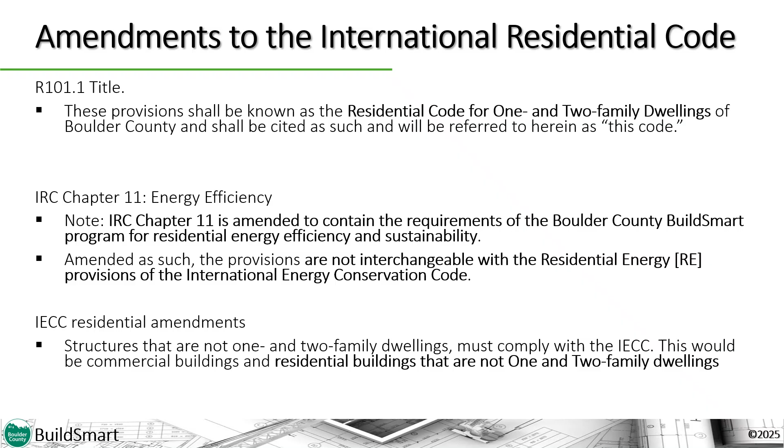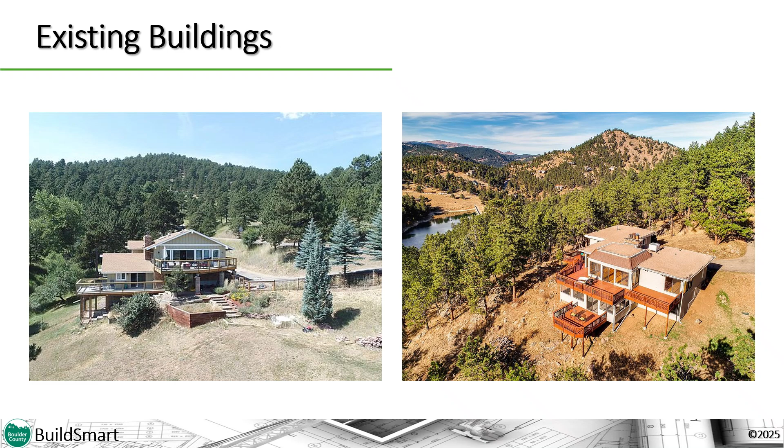For information regarding requirements for additions, remodels, or alterations to existing buildings, you will need to start with Section N1109 of the BuildSmart code. If you are considering an addition to an existing home, you will then focus on Section N1110, and if you are considering a remodel or alteration to an existing home, you will focus on Section N1111.

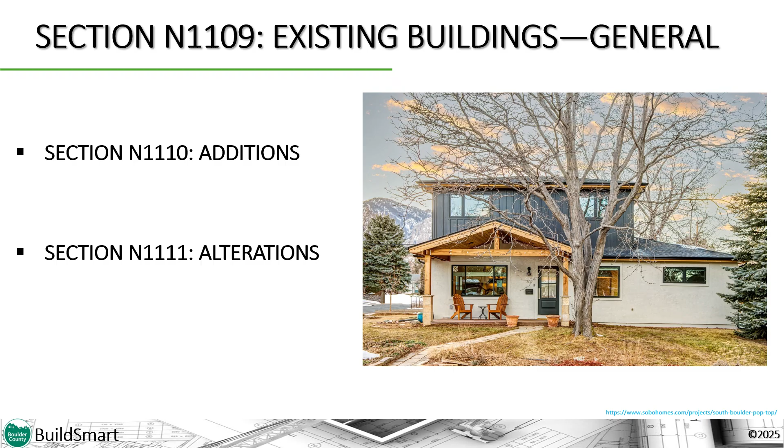Boulder County has also created a number of submittal guides specifically to help walk you through submitting for a building permit for an addition to an existing home or permitting a remodel or alteration to an existing home. These documents can be found on the county's website.

To begin your compliance journey for your existing home project, you will need to determine the total conditioned floor area of the proposed completed project. This means that the submitted construction documents must include both an existing and the proposed floor plans, so the total conditioned floor area can be verified.

This is the floor area used to determine the compliance pathway that you will have to use when you apply for your building permit. Just a note here that will be explained in more detail later.

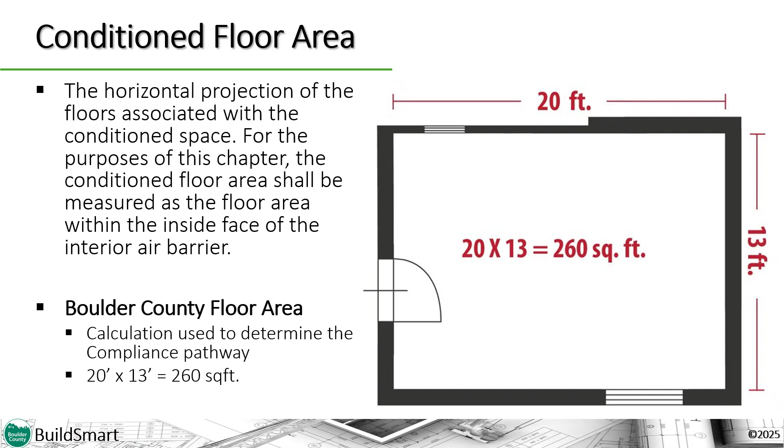When generating the HERS Energy Rating Index score, the rater will have to follow the RESNET HERS standard ANSI 301 and calculate the floor area based off of a measurement from outside wall to outside wall. I bring this up because you will need to recognize that these two numbers are different and are used to describe the conditioned floor area of your project for different purposes. Again, I will speak to this in more detail in a minute.

Similar to new construction, the provisions for demonstrating compliance when proposing to build an addition onto an existing building are broken up by the size of the addition. The prescriptive compliance option can only be used when building an addition that is less than or equal to 500 square feet of conditioned floor area.

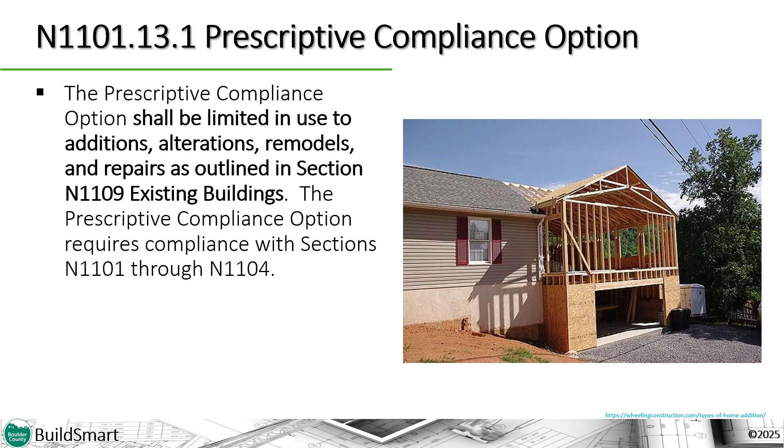The prescriptive compliance is a method of adhering to building codes by meeting specific predetermined requirements for individual building components or systems, such as a minimum R value for wall insulation, for example. The prescriptive compliance option does require compliance with Section N1101 through N1104, which are requirements that govern insulation R values, mechanical and lighting installations, and the like.

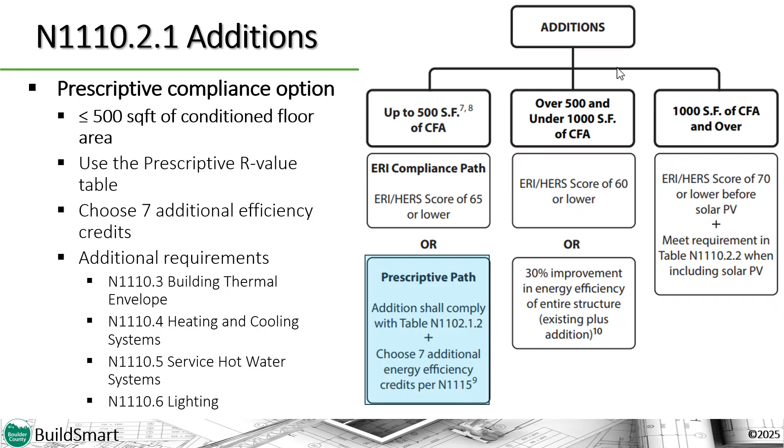If you choose the prescriptive compliance path, you will also have to choose 7 credits from the additional efficiency table N1115.1, which I'll show you in just a moment. Lastly, you will have to comply with the base code additional requirements for the building thermal envelope, HVAC and hot water systems, and any new lighting systems installed as laid out in the N1110 section. That often points you back to N1101 through N1104 requirements in the base code that I touched on earlier.

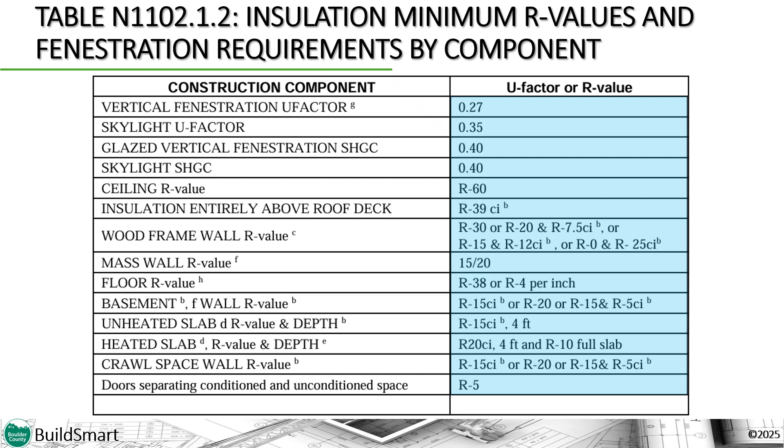This is a picture of the Boulder County BuildSmart Code's prescriptive R value table. This table is designed to determine what R values or fenestration requirements must be installed in the new construction portions of the addition, without requiring the unaltered portion of the existing building or building system to comply.

When using the prescriptive compliance path, it's always a good idea to read the footnotes to the R value table. For example, footnote B tells us that CI stands for continuous insulation. Footnote C explains that when the table says 20 and 7.5, it actually means R20 insulation in the cavity and R7.5 continuous insulation installed on the exterior walls.

Footnote E tells us that a heated slab requires insulation at both the slab edge and under the full slab. Therefore, a non-heated slab is only required to have slab edge insulation. And finally, footnote H refers to overhead doors for garages and shops that contain conditioned floor area.

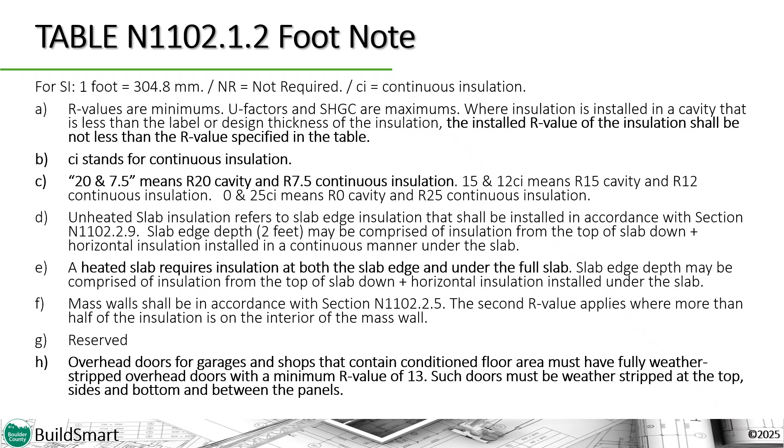This is the additional energy efficiency credit table that you would find in the BuildSmart code for the prescriptive compliance alternative. For additions that are 500 square feet or less, you have to choose to implement at least 7 credits from this table. It should be noted that options listed in this table that have already been integrated into the existing building and installed with a permit may be used to meet this requirement, regardless of their installation date or inclusion in the current scope of work.

This ultimately makes achieving the 7 credits from this table more manageable, as it gives you credit for upgrades to the home that were done before the addition was permitted.

Notice that the first additional energy efficiency credit is an energy audit. This could be a RESNET or BPI energy audit or equivalent that was conducted prior to the permitting of the house for an addition or alteration, and it can offer information that is helpful to guide your project toward cost-effective updates to the home that could be made at the same time that the addition is being constructed.

Don't forget that there is a requirement to provide documentation about the energy efficiency credits that you choose. Specifically, BuildSmart states that supporting documents for selected additional energy efficiency measures, such as an energy audit report, a furnace specification sheet including its efficiency rating, or proof of installation of an electrical vehicle charging station, must be submitted to Boulder County at the time of permitting if you are claiming the credit for something that was installed prior to the starting of the addition or before the building permit is closed out.

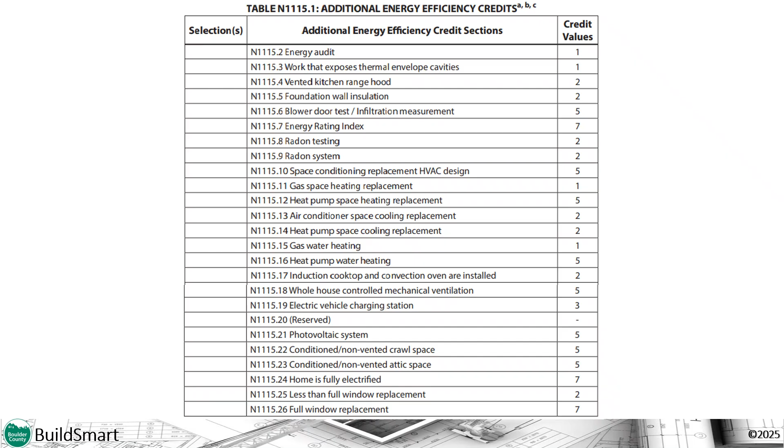There are two cases where additions that are 500 square feet or less must use the HERS Energy Rating Index compliance option. There's no other alternative. First would be additions that are greater than 200 square feet of floor area that result in a home that, in total, is greater than 2,500 square feet in conditioned floor area. In this case, they must use the HERS Energy Rating Index compliance pathway.

The second would be a conversion of a non-conditioned space to a conditioned space. This too must use the HERS Energy Rating Index compliance pathway. Converting an attached garage to a bedroom would be an example of this case.

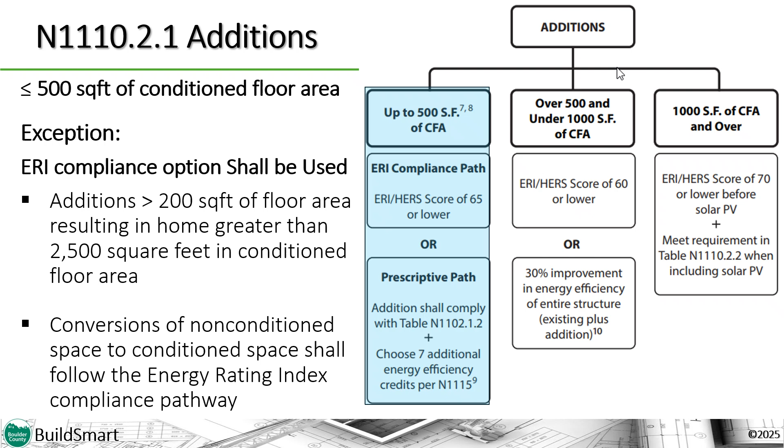Again, when generating the HERS Energy Rating Index score, the rater will have to follow the RESNET HERS standard ANSI 301 and calculate the floor area based off of a measurement from outside wall to outside wall, as represented by the blue lines on the diagram on this slide.

In this case, the conditioned floor area is 294 square feet instead of the 260 square feet calculated based on the Boulder County definition and methodology for calculating conditioned floor area to determine what compliance approach to follow. I bring this up again to be clear that you will need to recognize that these two numbers are different and are used to describe the conditioned floor area for your project for different purposes.

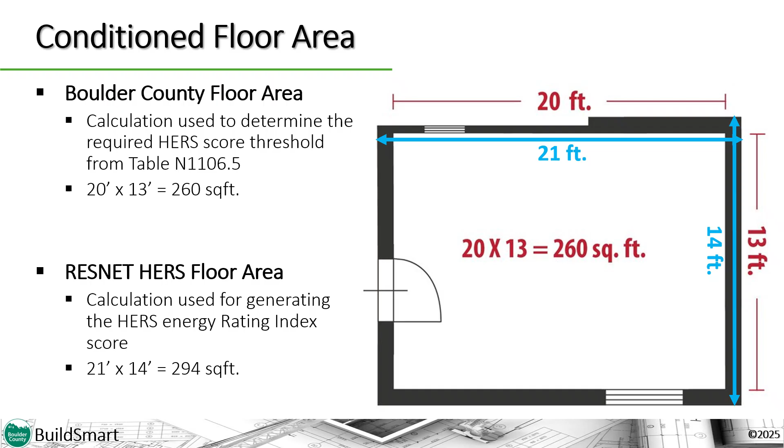We are now moving away from prescriptive compliance requirements and we'll be talking about the HERS Energy Rating Index compliance option. The HERS compliance option requires that the existing building plus the addition achieve a maximum HERS Energy Rating Index score based on the size of the addition.

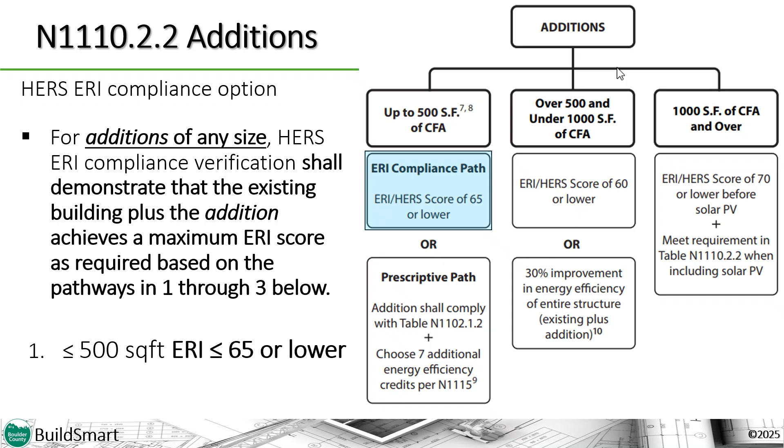If one chooses to use the HERS Energy Rating Index path for an addition that is 500 square feet or less, they have to achieve a HERS Energy Rating Index of 65 or less for the building as a whole unit. Remember that additions that are 500 square feet or less may choose to use the prescriptive approach or the HERS Energy Rating Index approach to demonstrate compliance, with the two exceptions that we just spoke about.

For additions that are greater than 500 square feet and less than 1,000 square feet, the home must achieve a HERS Energy Rating Index of 60 or lower, or additions of this size may choose to demonstrate compliance by demonstrating a 30% improvement in energy efficiency with a HERS Energy Rating Index score evaluation prior to starting the work.

This means that projects choosing to demonstrate a 30% improvement in energy efficiency using the Energy Rating Index score must first provide an existing home and proposed HERS analysis at the time of the permit application. The existing home HERS energy analysis benchmarks the efficiency of the home on the HERS Energy Rating Index score prior to any work being done on the home.

The project's HERS analysis adds in the proposed addition and any other proposed upgrades to the home to demonstrate a 30% reduction in the HERS Energy Rating Index score as a result of the proposed work. Then finally, the project must provide a confirmed HERS Energy Rating Index before the final inspection, and the building permit is closed out per section

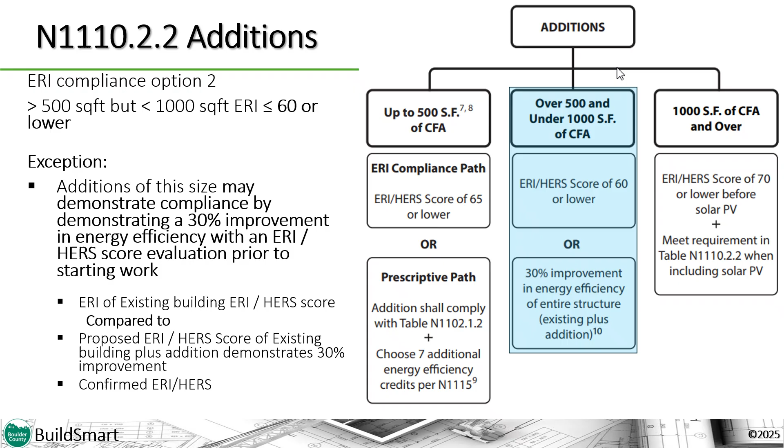N1101.13.2, which is the compliance application section of the BuildSmart code. This report is an analysis of the completed project to demonstrate that what was proposed was carried out and completed, therefore the building permit can be closed out.

Additions that are greater than 1,000 square feet must achieve a HERS Energy Rating Index score of 70 or lower before solar renewable energy systems are included in the energy analysis. These additions must also meet the HERS Energy Rating Index score listed in Table N1110.2.2 with the addition of solar PV.

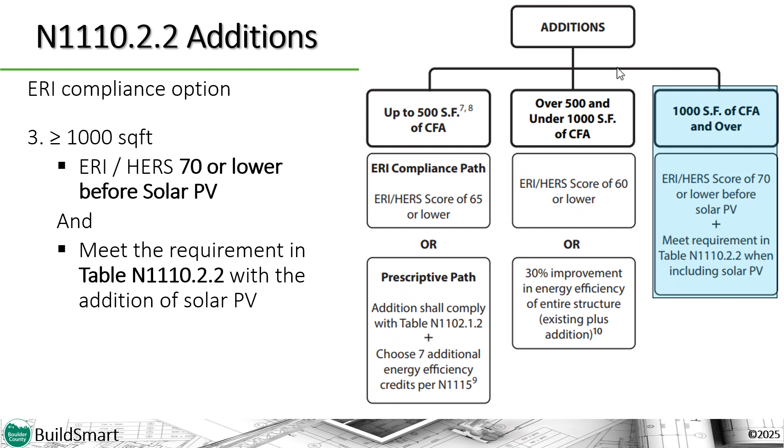The table's ERI score is based on the total square footage of the house, not the size of the addition. This would be the existing home plus the addition square footage to get the total conditioned floor area of the project that is used to meet the HERS requirement in Table N1110.2.2.

Similar to new construction, this HERS Energy Rating Index table that we have been discussing uses the total conditioned floor area of the house to determine the applicable HERS Energy Rating Index score requirement for the building as rated in its entirety. This is the HERS rating that includes the existing building plus the addition.

Because this can be a bit confusing, once again, this would be the existing home square footage plus the addition square footage to get the total conditioned floor area of the project that is used to determine the HERS requirement for the project in the table that is shown on this slide.

If an addition project can achieve the HERS Energy Rating Index score represented on this table based on the total conditioned floor area of the house without renewables, they are not required to install a solar PV system to lower the score to achieve the HERS Energy Rating Index score listed on this table.

For example, an addition of 1,500 square feet that results in a house with a conditioned floor area of a total 2,000 square feet requires that the house in its entirety achieves a HERS Energy Rating Index score of 66. If this can be achieved when creating the HERS Energy Rating Index score for the existing home plus the addition without renewable energy systems, then the home does not have to install a renewable energy system.

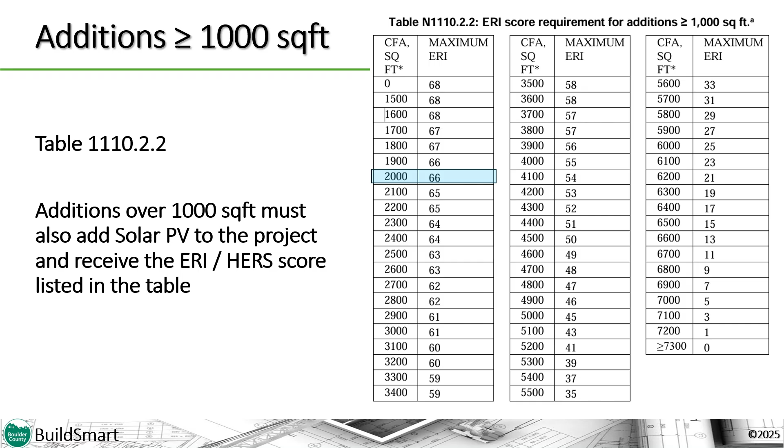If they can't achieve a HERS Energy Rating Index score of 66, they would have to add a PV system to the house to lower the HERS score to the appropriate level. Remember that this potential PV solar requirement only applies to large additions that are over 1,000 square feet.

The best way for additions to comply using the HERS Energy Rating Index compliance option is to do a HERS Energy Rating Index analysis at 3 distinct stages. First, conduct a HERS rating of the existing building before the addition is started. This will baseline the existing home's HERS Energy Rating Index performance, and this information is used in the future analysis that includes the addition to determine how to achieve the HERS Energy Rating Index score needed depending on the size of the addition.

Second, conduct a projected energy rating index analysis of the existing building plus the addition to determine what energy specifications need to be included in the construction of the addition and what potential energy upgrades may make sense to consider in the existing home in order to meet the required HERS Energy Rating Index score for compliance. For example, does it make sense to air seal and insulate the existing building at the same time the crew is air sealing and insulating the addition? This projected HERS Energy Rating Index analysis is also the compliance report that is needed for permitting the addition.

And finally, conduct a final confirmed HERS Energy Rating Index analysis to demonstrate that the building plus the addition complies with the required HERS Energy Rating Index score for that particular project. The HERS score reporting must be turned into the building department before final inspection to close out the building permit.

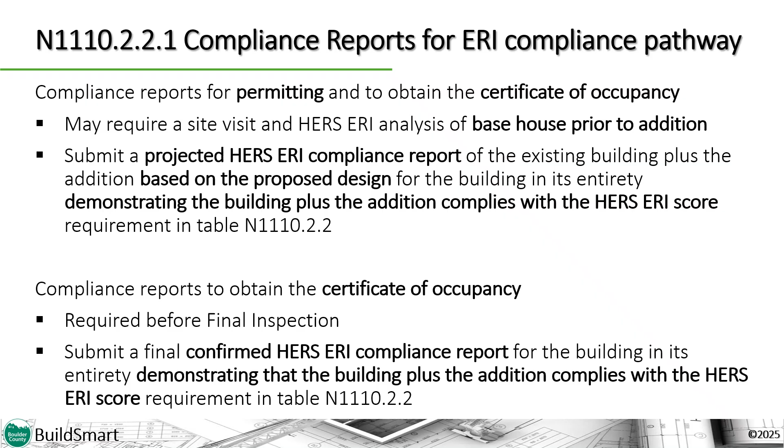The reality is that the prescriptive and the HERS Energy Rating Index compliance options require compliance with sections N1101 through N1104 as outlined in the additions section N1110. These requirements primarily cover the installation of insulation and other energy features, mechanical and lighting, and compliance report requirements. Compliance with N1101 through N1104 also includes providing construction documents that have detailed diagrams or plan details of the building's thermal envelope.

In addition, the construction documents must include the insulation values for the new construction components of your addition, and the details in your construction documents must match the requirements of your chosen BuildSmart pathway, either the HERS Energy Rating Index report or prescriptive R value and U factor table N1102.1.2.

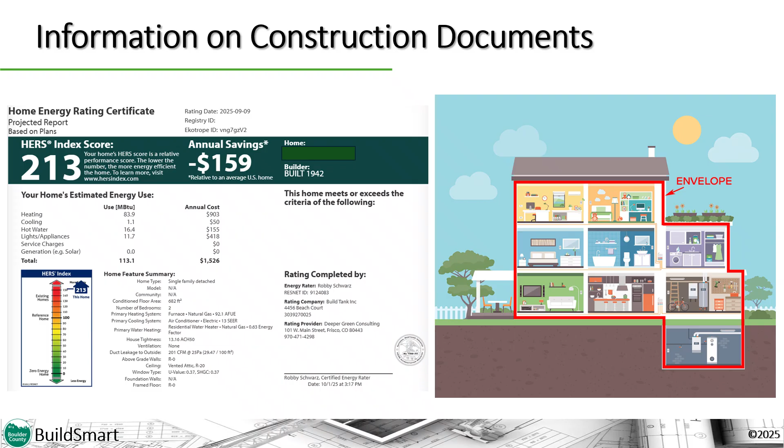Now we're going to move on and discuss alterations and remodels. An alteration is defined in the BuildSmart code as any construction, retrofit, remodel, or renovation to an existing structure other than a repair or an addition. Also, a change in a building electrical, gas, mechanical, or plumbing system that involves an extension, addition or change to the existing arrangement or layout, type, or purpose of the original installation. Alterations may convert unfinished conditioned space to finished space or may impact the building's thermal envelope.

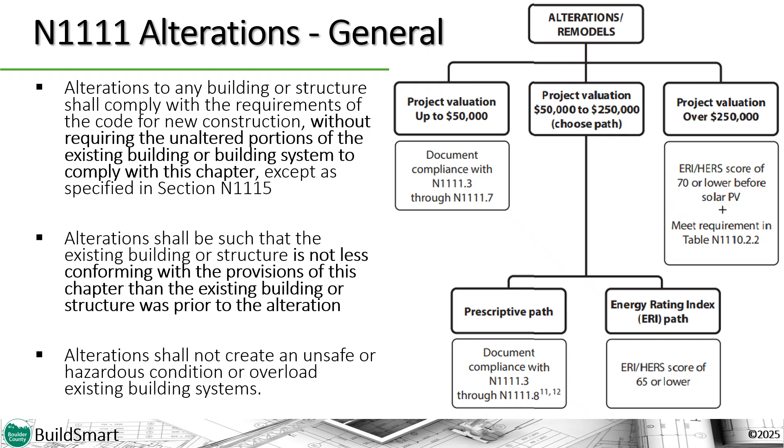Here is the Boulder County Quick Guide for navigating the alterations section of the BuildSmart code that is provided on the Boulder County website. Alterations to a building or structure must comply with the requirements of the code for new construction without requiring that the unaltered portions of the existing building or building system comply, except as specified in section N1115, which is the additional efficiency credit we discussed earlier that is also pertinent to alterations. The compliance metric for alterations is that the existing building or structure is not less conforming with the provisions of this alteration section of the code than the existing building or structure was prior to the alteration.

Instead of using conditioned floor area, alterations use valuation of the project to determine the path of compliance. When both an addition and alteration are proposed at one project, the valuation provided should be for both the construction of the addition and the altered portions of the project.

So first determine the fair market value of the project, including both materials and labor. Be sure to assign a reasonable labor cost, even if the work will be performed by a property owner. In addition, the valuation factor may include the total value of the proposed work plus the value of any permitted alteration that has occurred in the prior 24 months. Any increase in project valuation due to the required energy efficiency upgrades in one compliance pathway are not required to be factored into the determination of the applicable compliance pathway.

After you have determined the valuation, then determine if you can use the prescriptive or the HERS Energy Rating Index compliance alternative. Remember, at the time of permit application, the applicant for the building permit is the one that must provide the valuation estimate. Valuations must reflect the total value of the work, including materials, labor for which the permit is being issued, such as electrical, gas, mechanical, plumbing, equipment, and permanent systems that are added to the house.

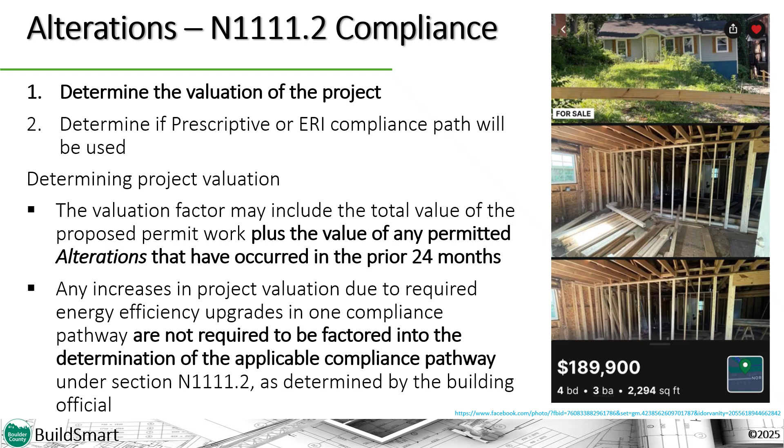Prescriptive compliance is the only compliance pathway used for alterations that have a valuation of $50,000 or less. If the valuation of your project is between $50,000 and $250,000, you can choose to use the prescriptive compliance or the HERS Energy Rating Index compliance alternative. Either way, be sure to clearly indicate on your construction documents the compliance pathway you choose.

Prescriptive compliance merely requires that you document compliance with the building thermal envelope, replacement fenestration, heating and cooling systems, service hot water systems, and lighting requirements as spelled out in the alteration section of the BuildSmart Code, section N1111.

In addition, provide supporting documentation that could include an energy audit report, a furnace specification sheet including its energy efficiency rating, or proof of installation of an electric vehicle charging station. This type of documentation must be submitted to Boulder County at the time of permitting if you are claiming credit for something that was installed prior to the start of the alteration or remodel, or before the building permit is closed out.

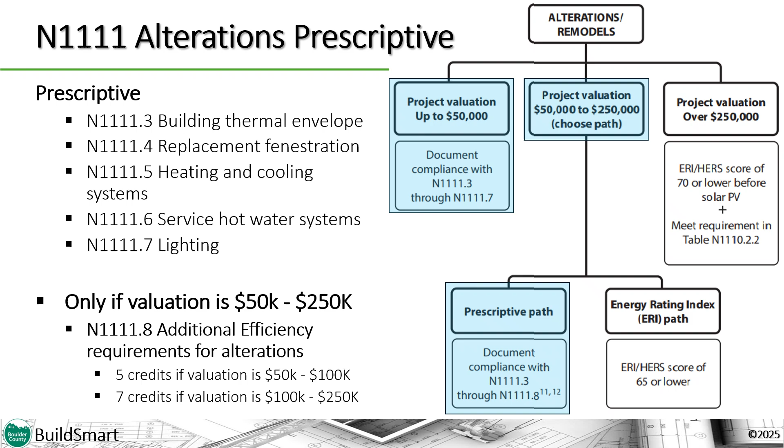Alterations using the HERS Energy Rating Index compliance approach use the same compliance metric as discussed for HERS Energy Rating Index compliance with additions. This means that the best way for alterations to comply with the HERS Energy Rating Index compliance option is to do a HERS Rating Index analysis at 3 stages as discussed earlier.

Number 1, benchmark the home's HERS Energy Rating Index score before the alteration takes place. Number 2, conduct a from-plans or projected HERS Energy Rating Index analysis to determine how best to achieve the required Energy Rating Index score for the project. Number 3, when the project is complete and in order to close out the permit, conduct a final HERS Energy Rating Index analysis to demonstrate that the project achieved the level of performance that was projected in step number 2.

The benefit of this approach is that you can take advantage of potentially making other cost-effective energy upgrades to the unaltered portion of the home, in addition to what was previously thought about or planned for. For example, it might make sense to consider adding insulation in the existing attic at the same time that the insulator is out insulating the altered building thermal envelope.

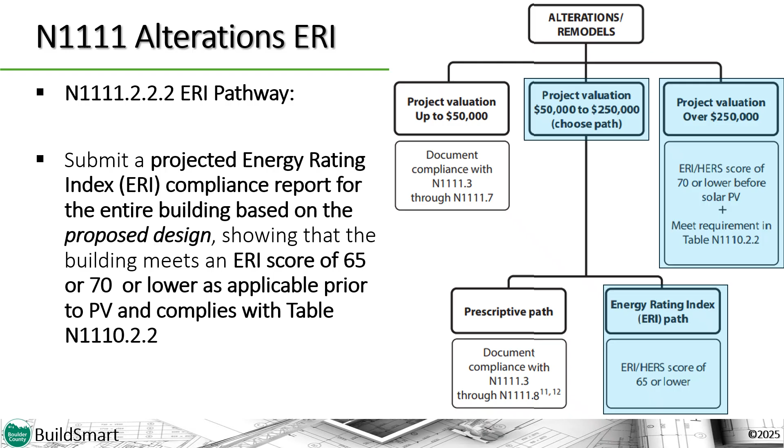Lastly, Boulder County requires that compliance with the BuildSmart Code include proposed design HERS energy rating modeling, field inspection, and final confirmed HERS energy modeling be carried out by an approved third-party RESNET HERS energy rater. Energy raters are required to view the BuildSmart mandatory requirements for construction professionals video presentation that is located on the Boulder County website. Other construction professionals, such as architects, builders, and trade partners, are encouraged to view the presentation as well.

So to conclude, we see that the BuildSmart Code allows a prescriptive compliance option for existing homes that are less than or equal to 500 square feet. But in general, the code really encourages the use of the HERS Energy Rating Index compliance pathway. Again, this enables a more holistic approach that takes into account the existing building and the addition or alteration that will be added to it.

Like with new construction, the HERS Energy Rating Index compliance approach can reveal the most cost-effective way to achieve better performance and compliance with the BuildSmart Code. It also has the potential to create more comfort for the homeowner, as there is an opportunity to see what might make sense to address in the existing portion of the home prior to construction.

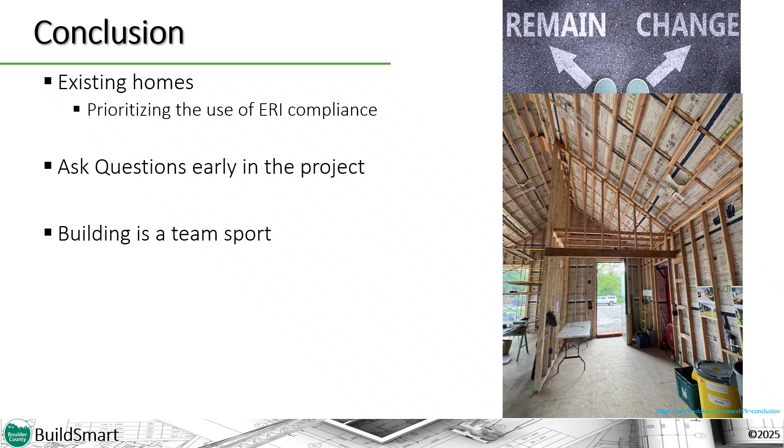Thank you for listening to this presentation of BuildSmart compliance for existing home construction.